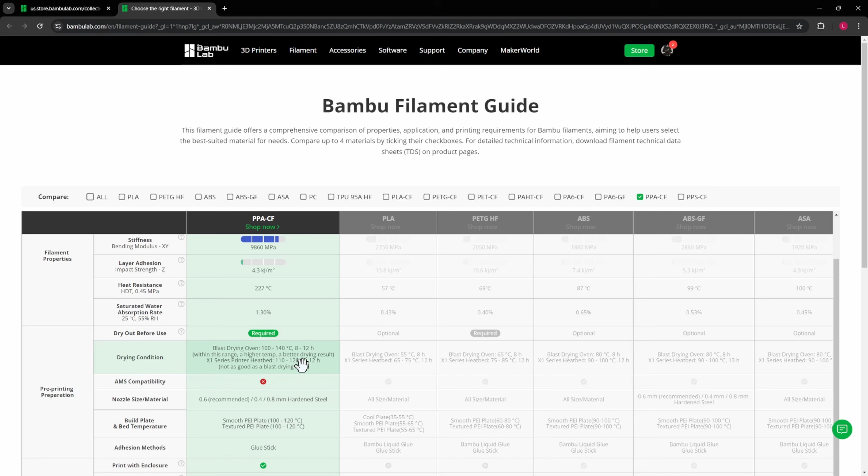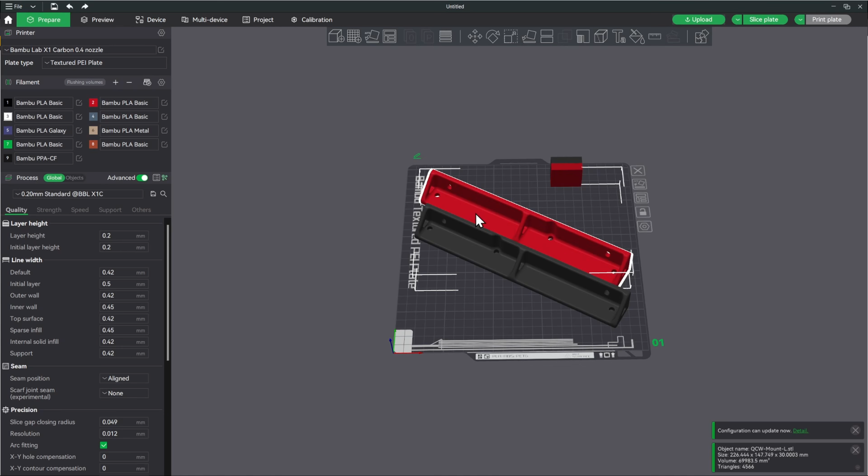And again, if you just push the numbers on your keypad, that's what selects whatever number is there. So like the red one is number 2, white is number 3, and this particular one is on number 9. So you can see that I've done that. Click this one, push 9. Both of those have been selected with that PPA CF.

So let's take a look at the settings out of the box. So this is, right out of the box, what the settings are for the PPA CF. We're going to leave it alone and see how it prints. If you run into issues, most likely you need to raise the temperature of this or raise the bed temperature of it as well. This is very, very dependent on the temperature, both of the drying and of what you're printing at, to get the best results.

We'll also see that the max volumetric speed is 8, so this is going to print relatively slow compared to your PLAs, which I think are 20 or 22 or whatever, and your 15-minute benchies and everything are going to be with a much higher max volumetric speed. So we'll leave everything alone here. These are all the settings that come out of the box.

Again, if we run into issues, the things that we'll want to take a look at are going to be the nozzle temperature as well as the bed temperature. Those would be things that we would need to raise up if we run into problems. But we'll cross that bridge if we need to. So we'll leave all of that stuff alone.

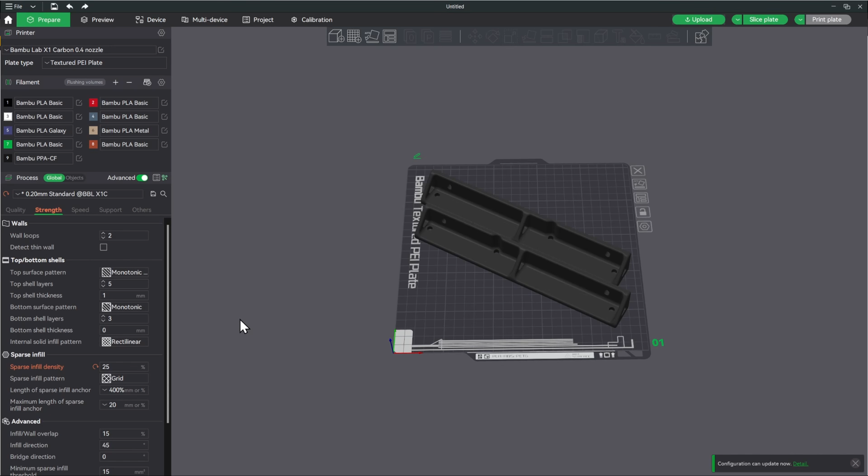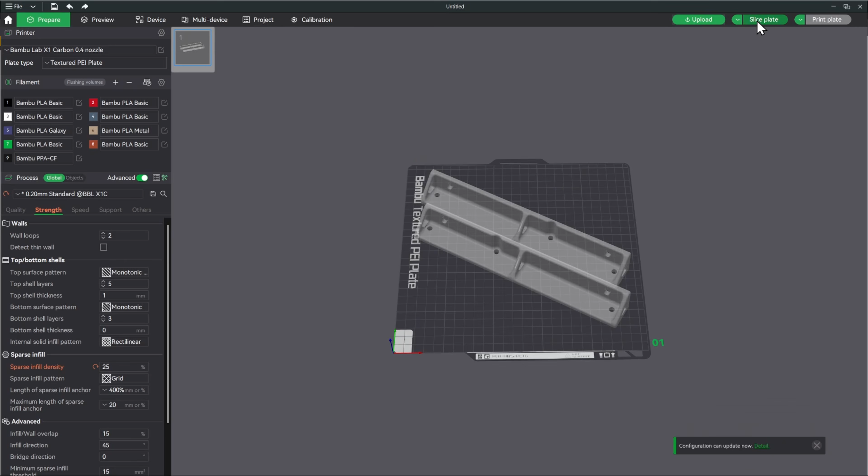Anytime you do brackets and stuff like that, make sure you change this infill and make it a little bit thicker. So let's see how long it's going to take to print with these. So 3.5 hours with the PPA CF, and let's go back and we'll change this to the normal PLA real fast, and with the same settings and everything, you can see it's an hour faster to do that, and the biggest reason why is the max volumetric speed.

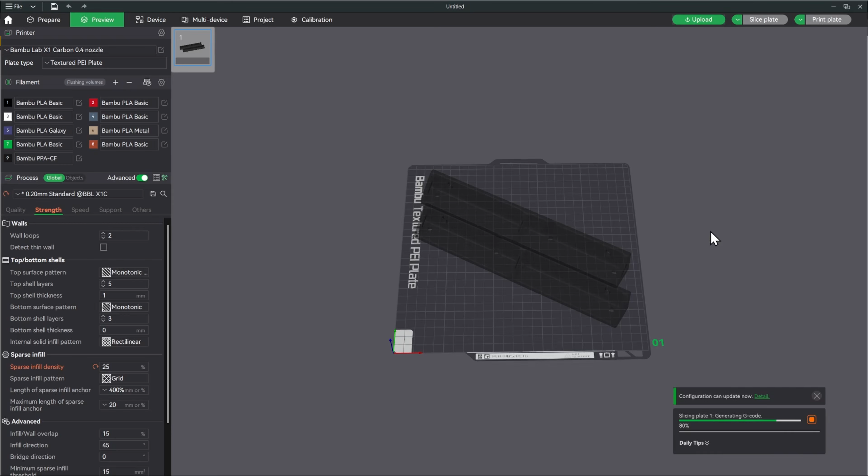So just keep in mind that when you're printing with this, it's going to be very high temperature, and it's going to print at a much lower rate than other filaments that you're used to. So I'll go ahead and get this printed, and I'll see you when it gets done. And make sure when you go to print this that you deselect enable AMS so it knows that you're using the outside spool, or in my case, just running it from the S4.

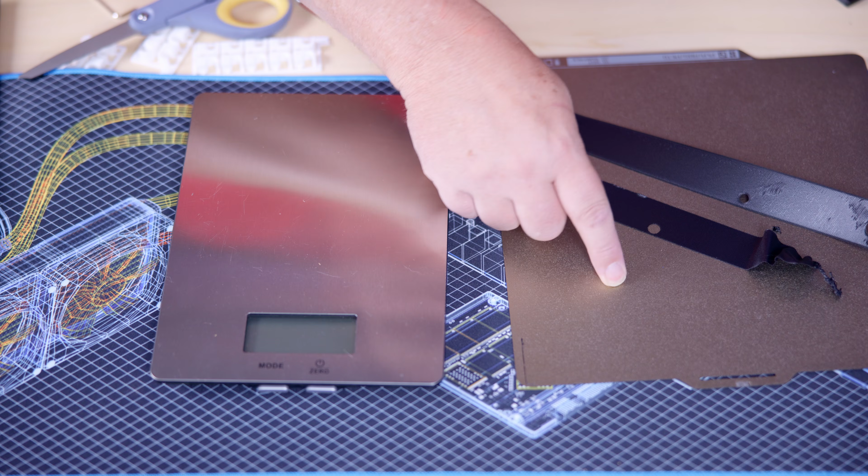All right, so as you can see on the textured plate, without putting any glue or anything on there, 2 times I had it kind of fail on the print. But I did it on the high temperature plate, and it printed out perfectly on that. The quality of the print is really good. It does kind of have that rough texture like you get with other carbon fiber, right? It's smooth kind of on the build plate, but everywhere else it's a little bit rough.

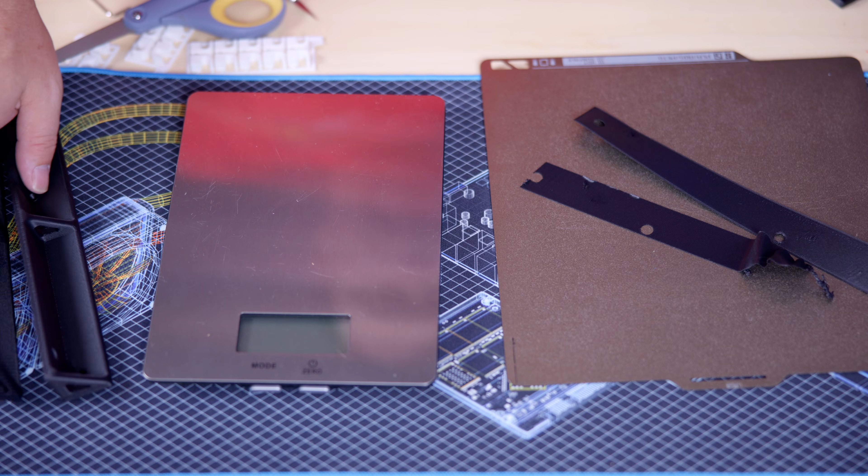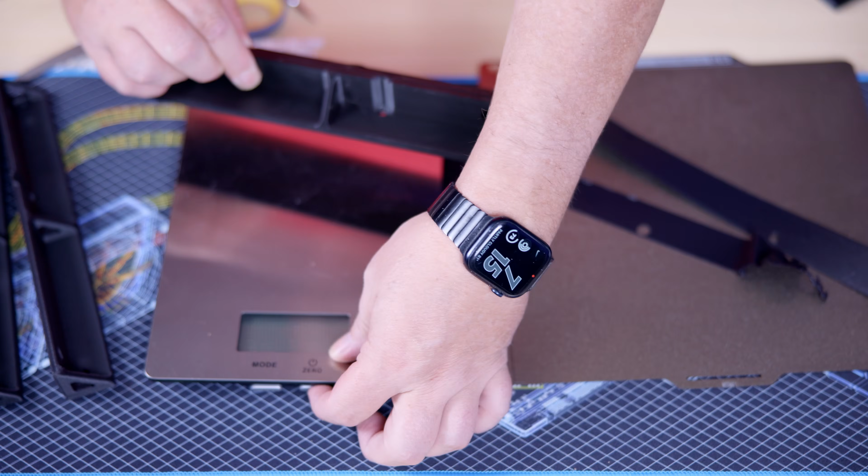Now I did print this same model in PLA with the same 25% infill. So let's take a look at the weight difference between the two. So we know that there should be a significant strength difference between this one and this one, but I'm sure there's going to be a pretty big weight difference as well. So let's take a look at the PLA. And we have 131, 132 grams.

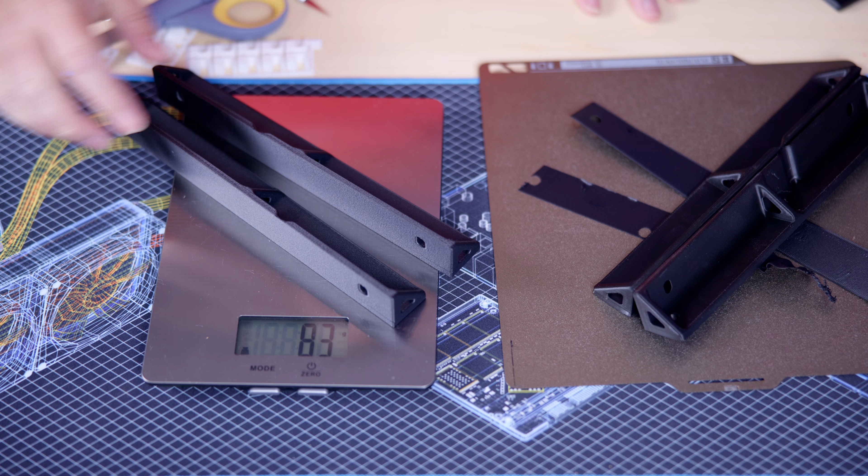Let's look at the PPA carbon fiber in 83 grams. So that's about 60% of the weight. So 40% weight reduction just in this thing here. And this has got to be way stronger than everything else. Now, when I printed this in PLA, it did have a little bit of warping on the ends here. When I printed it with this stuff, it printed perfectly, other than printing on the textured plate.

So if you're planning on using this and putting it on the textured plate, you're probably going to need to do some further calibration and probably raise the bed temperature, or maybe try putting glue on here. But with the high temperature plate or the smooth PEI plate, this stuff printed perfectly first time right away, and you're able to do the flow calibration on that, so that kind of helps as well, I think.

So this is a pretty niche filament here, although it did sell out pretty fast. I think within a couple of days. It looks like October 15th, in a couple of weeks, they're going to have some more. If you want to try some of this, it's super duper expensive, but if you do need the strength or the heat resistance or anything like that, this is definitely the way to go.

The tips and tricks with this is you got to have a game plan for drying this filament out. And then I would have some sort of system that keeps it dry while you're printing. So I'll leave a link in the description below to the YouTube video that I showed with the DIY heat box. And if you're going to be printing a whole lot of this, that is what I would definitely recommend for that.